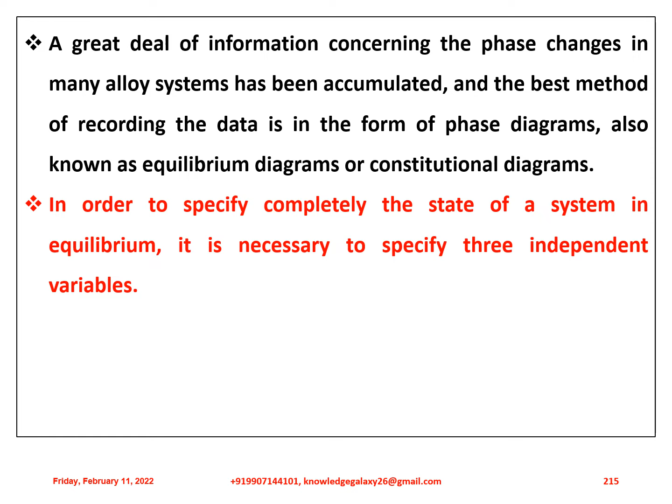In order to specify completely the state of a system in equilibrium, it is necessary to specify three independent variables. These variables, which are externally controllable, are temperature, pressure, and composition.

With pressure assumed to be constant at atmospheric value, the equilibrium diagram indicates the structural changes due to variation of temperature and composition. The diagram is essentially a graphical representation of an alloy system. Do remember this.

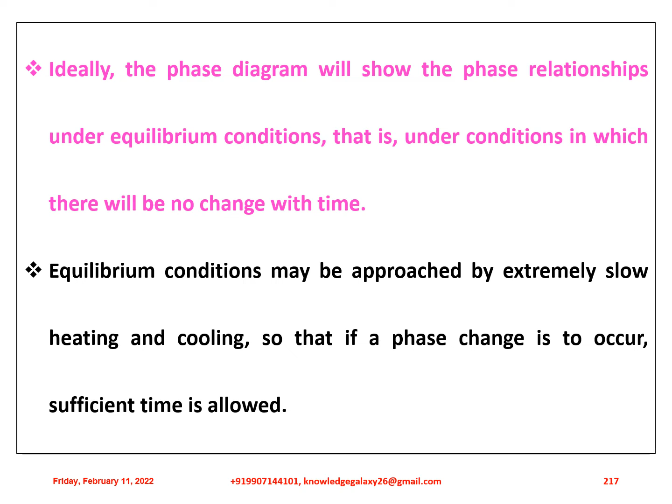Ideally, the phase diagram will show the phase relationships under equilibrium conditions, that is, conditions in which there will be no change with time. Equilibrium conditions may be approached by extremely slow heating and cooling, so that if a phase change is to occur, sufficient time is allowed.

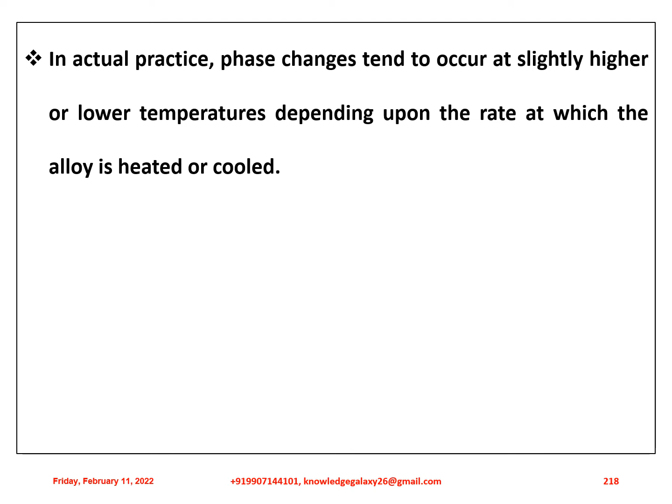In actual practice, phase changes tend to occur at slightly higher or lower temperatures depending upon the rate at which the alloy is heated or cooled. Rapid variation in temperature, which may prevent phase changes that would normally occur under equilibrium conditions, will distort and sometimes limit the application of these diagrams.

So let us have the introduction of the phase diagrams. Phase diagrams are an important tool in the armory of a materials scientist. In the simplest sense, a phase diagram demarcates regions of existence of various phases. So you can also correlate phase diagrams to a map, as maps guide us to our desired location, and so the phase diagrams also guide us to the knowledge of the various alloy systems.

Phase diagrams are also referred to as equilibrium diagrams or constitutional diagrams. The usage requires special attention, though the term used is equilibrium. In practical terms, the equilibrium is not global equilibrium but microstructural level equilibrium. So don't get confused with this, and clearly understand what is said for phase diagrams or equilibrium diagrams.

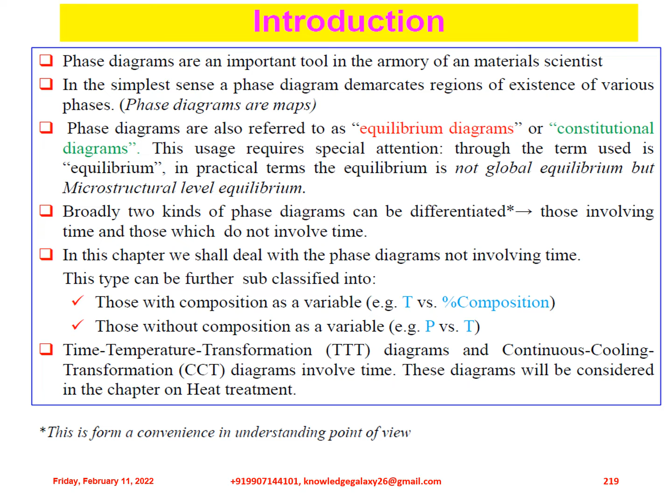Broadly, two kinds of phase diagrams can be differentiated, for convenience of understanding: those involving time and those which do not involve time. Presently we will be dealing with phase diagrams not involving time, and this type can be further subclassified into those with composition as a variable, example temperature versus percentage composition, and those without composition as a variable, example pressure versus temperature. Time temperature transformation (TTT) diagrams and continuous cooling transformation (CCT) diagrams involve time. These diagrams will be considered in a separate presentation.

So let us now discuss some definitions which are very useful and always used in phase diagrams. First, to start with, components of a system: independent chemical species which comprise the system. These are called components of the system. They could be elements, ions, or compounds.

Some examples: a gold-copper system, where the components are gold and copper, which are elements. Second, an ice-water system, where the component is H2O, a compound. Next, an example is an Al2O3 and Cr2O3 system, where the components are Al2O3 and Cr2O3.

Next term is phase. A phase is a physically homogeneous and distinct portion of a material system, example gas, crystal, amorphous, etc. Let us consider each one in detail.

Gases: the gaseous state is always a single phase, even if it is mixed at the atomic or molecular level. Second, liquids: a liquid solution is a single phase, that is, NaCl in water, and liquid mixtures consist of two or more phases, example oil in water, where there is no mixing at the atomic level.

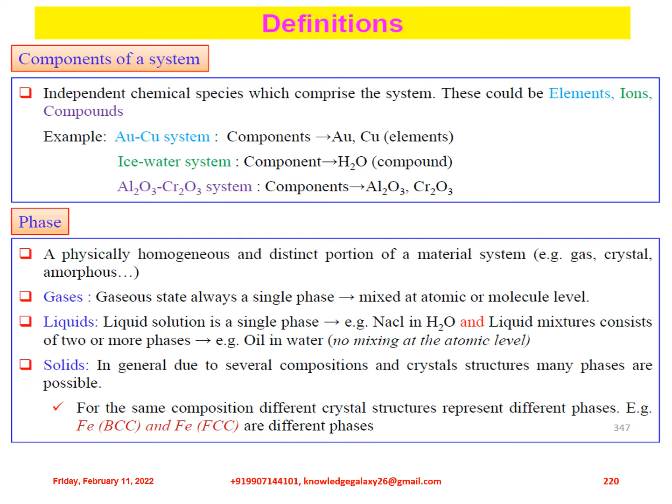Third, solids: in general, due to several compositions and crystal structures, many phases are possible. So for the same composition, different crystal structures represent different phases. Example: iron BCC and iron FCC are different phases.

Let us continue with some more definitions. What kinds of phases exist? My dear friends, there are practically six types of phases that exist. Let us discuss them. First, based on state: gas, liquid and solid.

Second, based on atomic order: amorphous, quasi-crystalline and crystalline. Third, based on band structure: insulating, semiconducting, semi-metallic and metallic. Next, based on property: paraelectric, ferromagnetic and superconducting. Next, based on stability: stable, metastable and unstable. Also, sometimes based on size or geometry of an entity: nanocrystalline, mesoporous and layered.

So now let us discuss phase transformation. What is called a phase transformation? Phase transformation is the change of one phase into another. For example, when water turns to ice, and alpha iron (BCC) turns to gamma iron (FCC), they are called phase transformations.

Grain is another important point and aspect. The single crystalline part of a polycrystalline metal, separated from similar entities by a grain boundary, is known as a grain. I hope it is clear to all of you.

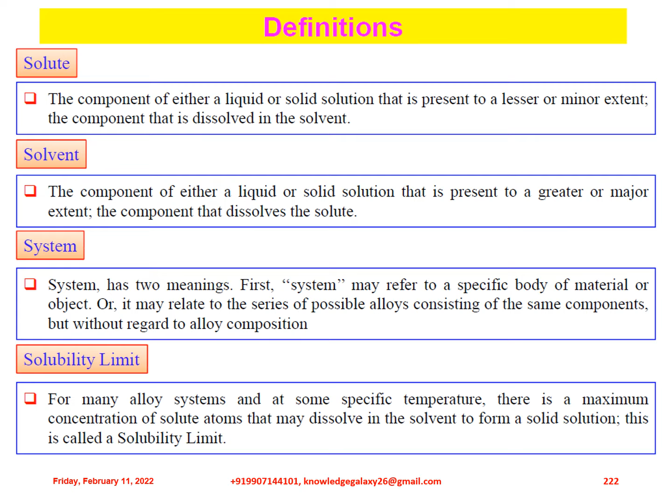Solubility limit. For many alloy systems, at some specific temperatures, there is a maximum concentration of solute atoms that may be dissolved in the solvent to form a solid solution. This is called a solubility limit.

Some more definitions to continue. Microstructure: phases plus defects plus residual stresses and their distribution. This is broadly the microstructure, consisting of structures requiring magnifications in the region of 100 to 1000 times, or the distribution of phases and defects in a material. It is commonly called microstructure.

Phase diagram: a map that gives the relationship between phases in equilibrium in a system as a function of temperature, pressure and composition. It is the map demarcating regions of stability of various phases, giving knowledge about the various phases and their stability and instability over different temperatures and concentration. Now let us discuss the variables or axes of phase diagrams.

The axes can be thermodynamic, that is temperature, pressure and volume, and next is kinetic or composition variables, C or percentage X. In a single component system, unary system, the usual variables are temperature and pressure. In phase diagrams used in materials science, the usual variables are temperature and percentage composition. In the study of phase transformation kinetics, TTT diagrams or CCT diagrams are also used, where the axes are temperature and time.

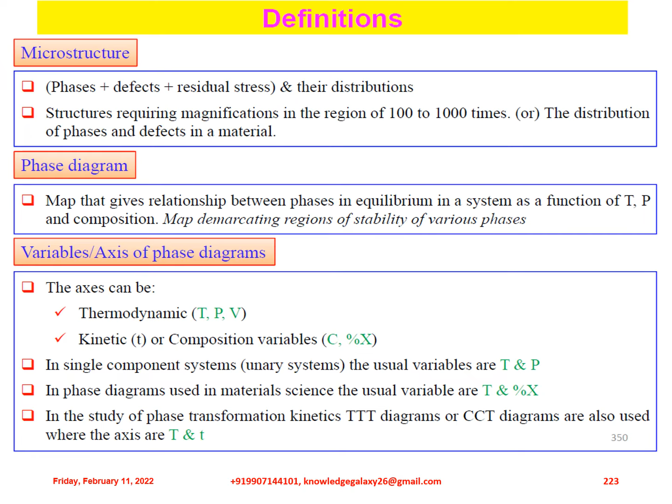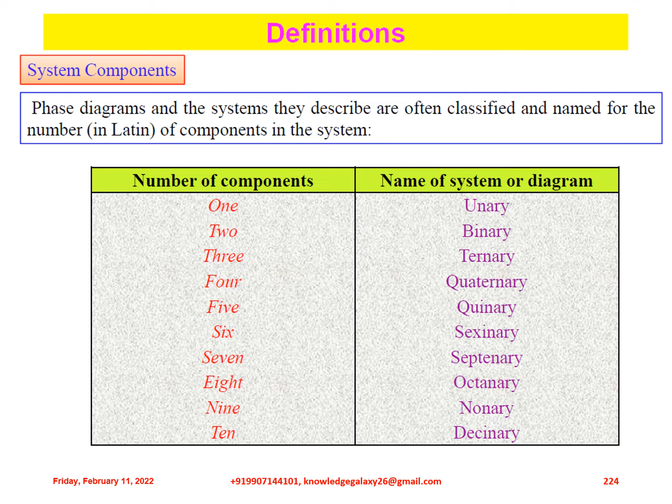Now let us consider unary phase diagrams in detail. Let us start with the simplest system possible, the unary system, wherein there is just one component. Though there are many possibilities even in unary phase diagrams in terms of the axes and phases, we shall only consider a temperature and pressure unary phase diagram.

The Gibbs phase rule here is F equals C minus P plus 2, where 2 is for temperature and pressure. I hope you remember the Gibbs phase rule, and if you have forgotten, you can refresh your knowledge by visiting my video on my channel regarding the Gibbs phase rule. So no composition variables are available here.

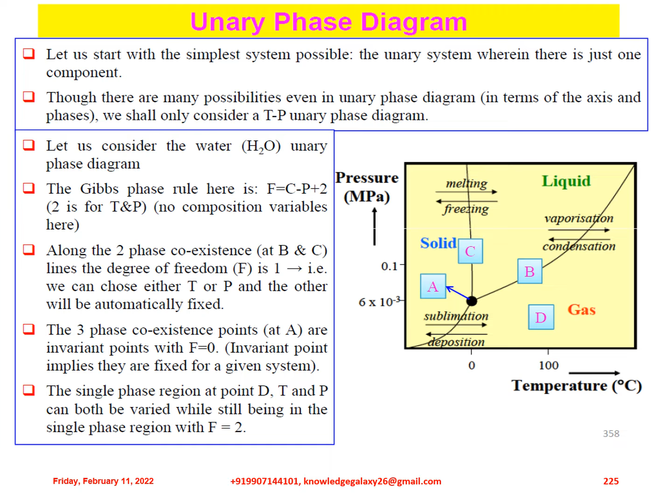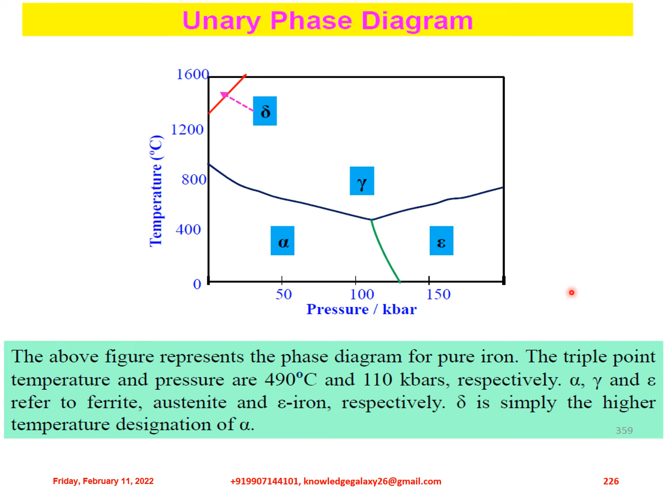Let us now consider binary phase diagrams. Binary implies that there are two components. Pressure changes often have little effect on the equilibrium of solid phases unless we apply huge pressures. Hence, binary phase diagrams are usually drawn at 1 atmospheric pressure.

The Gibbs phase rule is reduced to F equals C minus P plus 1, where 1 is for temperature only. Temperature and composition are the usual variables in materials phase diagrams. So the phase rule for condensed phases comes to F equals C minus P plus 1, with 1 for temperature, so don't get confused.

In the next page, we will consider the possible binary phase diagrams. These have been classified based on: first, complete solubility in both liquid and solid states; second, complete solubility in the liquid state but limited solubility in the solid state; and third, limited solubility in both liquid and solid states.

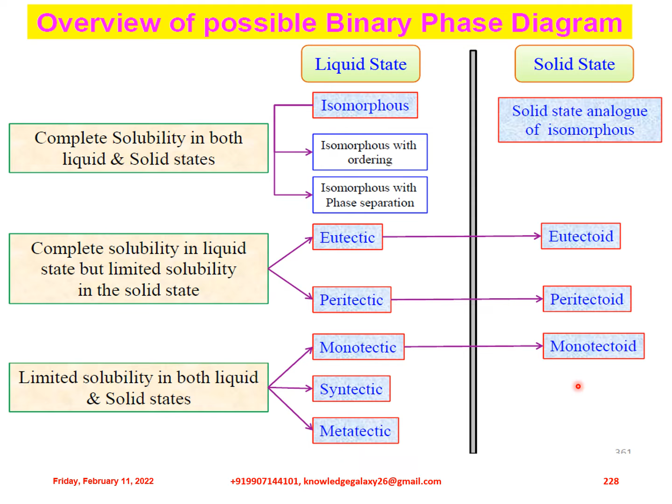Next comes limited solubility in both liquid and solid states. They have three types in the liquid state: monotectic, syntectic, and metatectic, and monotectoid in the solid state. I hope it is very much clear to you all.

Now let us consider the coordinates of phase diagrams. Phase diagrams are usually plotted with temperature in degrees centigrade, Celsius, or Fahrenheit as the ordinate, and the alloy composition in weight percentages as the abscissa.

The weight percentage of component A, WA, equals the weight of component A divided by the sum total of the weight of all components, into 100. Next, the atom or mole percentage of component A, XA, is given by the number of atoms or moles of component A divided by the sum total of number of atoms or moles of all components, into 100. I hope these calculations are very much clear to you all.

Atomic percentage of A equals X divided by (X plus Y into M by N), into 100. Atomic percentage of B equals (Y into M by N) divided by (X plus Y into M by N), into 100, where M is the atomic weight of metal A and N is the atomic weight of metal B. X is the weight percentage of metal A and Y is the weight percentage of metal B.

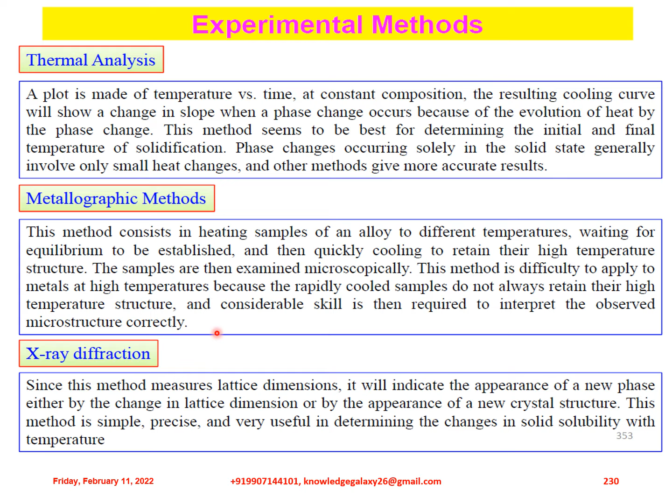Next method is X-ray diffraction. Since this method measures lattice dimensions, it will indicate the appearance of a new phase either by the change in lattice dimensions or by the appearance of a new crystal structure. This method is simple, precise, and very useful in determining the changes in solid solubility with temperature. I hope all these methods are very much clear to you all, and you should not have any doubt on them.

I hope we are doing so far so good. Now let us move on and study the classifications of equilibrium diagrams or phase diagrams, which may be classified as follows.

First, components completely soluble in the liquid state. Second, completely soluble in solid state, that is type 1. This is the subtype of 1.

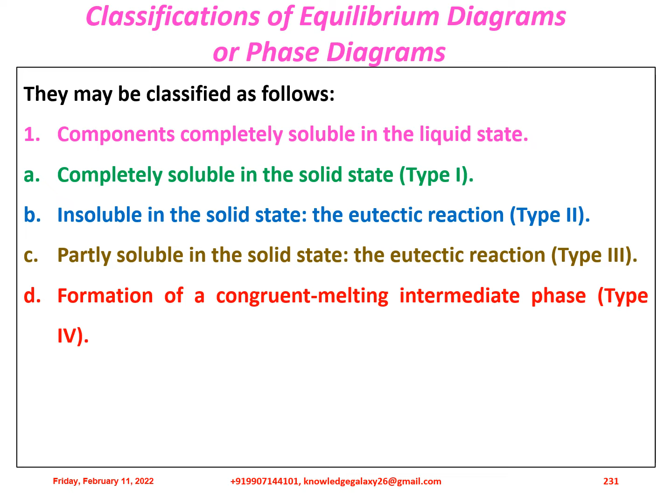Next is insoluble in the solid state, the eutectic reaction, that is type 2. Next is partly soluble in the solid state, that is the eutectic reaction, type 3. Fourth is formation of a congruent melting intermediate phase, that is type 4.

Fifth is the peritectic reaction, type 5. Second type of classification is components partly soluble in the liquid state, the monotectic reaction, that is type 6. Third type is components insoluble in the liquid state and insoluble in the solid state, they form type 7.

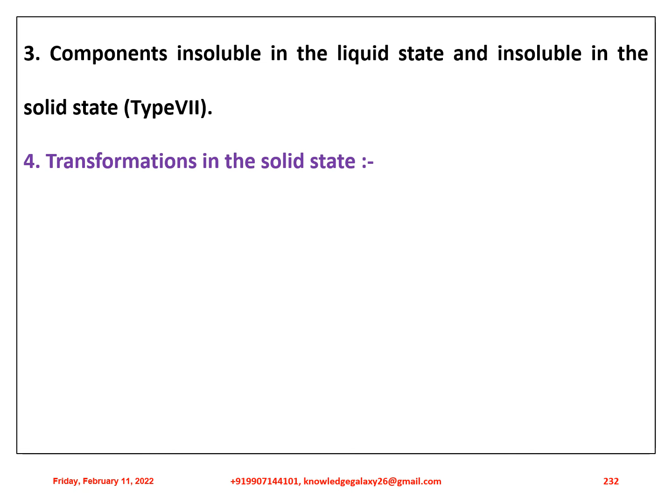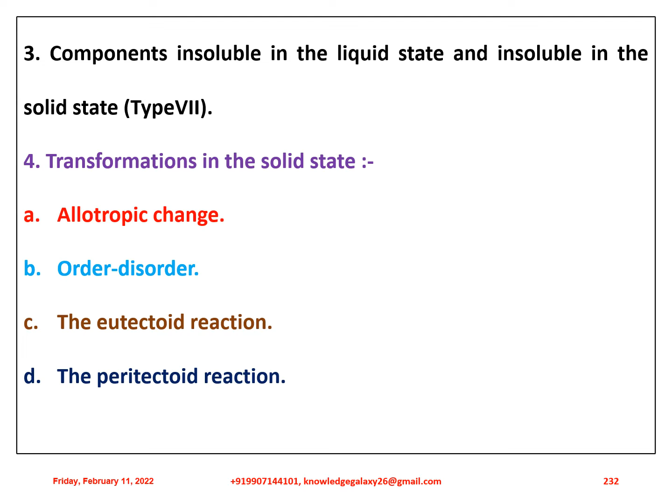Next is transformations in the solid state. There are many transformations which occur in the solid state. What are they? Let us discuss. First is allotropic change, next is order-disorder change, third is eutectoid reaction, and fourth is the peritectoid reaction. We will be discussing each of them in detail in the next detailed presentation.

Now we will be discussing in detail about the isomorphous phase diagram. Isomorphous phase diagrams form when there is complete solid and liquid solubility. Complete solid solubility implies that the crystal structure of the two components have to be the same and Hume-Rothery rules are to be followed. I hope you remember the Hume-Rothery rules, and if you have forgotten, you can watch my video on Hume-Rothery rules available on my channel.

Examples of systems forming isomorphous systems are copper-nickel, argentum-aurum, germanium-silicon, Al2O3 and Cr2O3 systems, etc. Both the liquid and solid contain the components A and B. In binary phase diagrams between two single phase regions, there will be a two phase region, that is, in the isomorphous diagram between the liquid and solid state, there is the liquid plus solid state. The liquid plus solid state is not a semi-solid state, that is, it is a solid of fixed composition and structure in equilibrium with a liquid of fixed composition and structure.

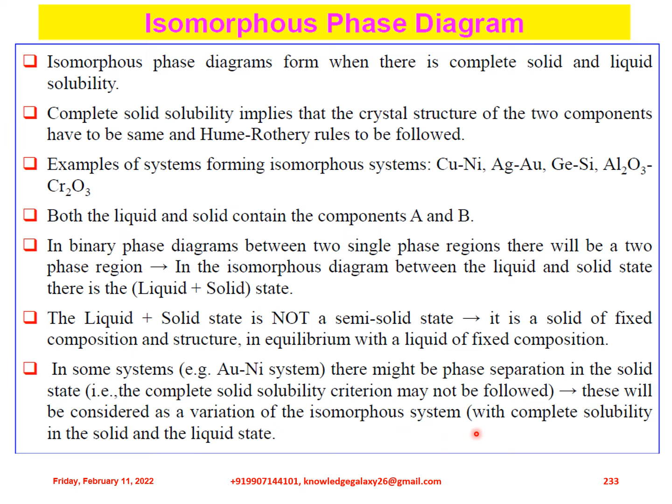In some systems, for example the aurum-nickel system, there might be phase separation in the solid state, that is, the complete solid solubility criterion may not be followed. These will be considered as a variation of the isomorphous system with complete solubility in the solid and liquid state.

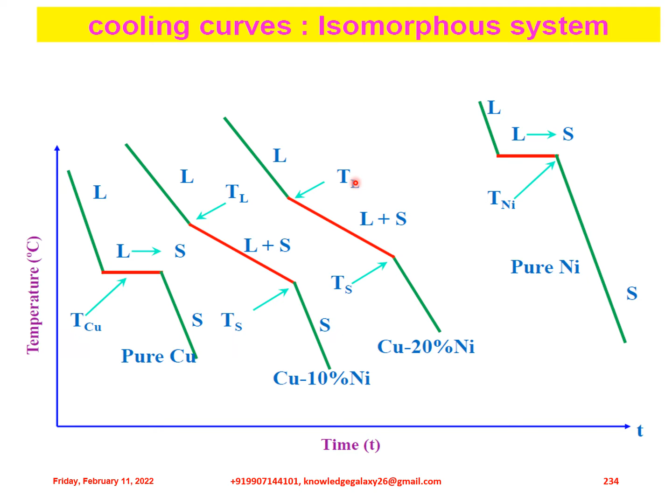These are the various cooling curves for isomorphous systems. We will be discussing each of them in detail.

So let us discuss solidification or cooling curves. This diagram is plotted against temperature and time. For this pure metal, as you can see, when solidification starts, the temperature falls, and the liquid starts to solidify at a given particular temperature, and it solidifies completely at a single temperature only, and then it solidifies further as a complete solid when the temperature is decreased further.

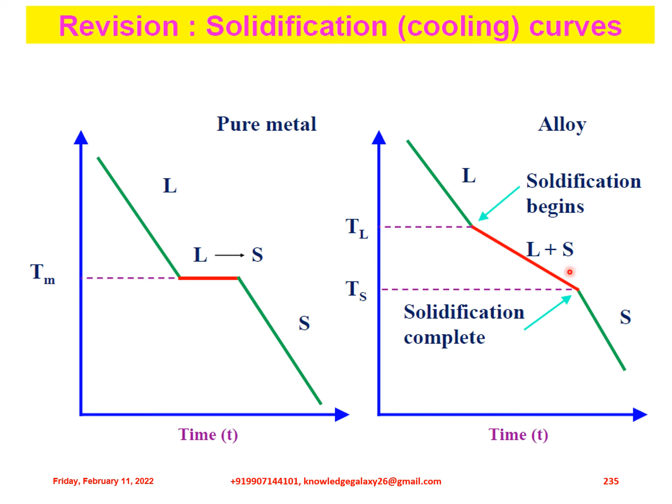In alloys, the solidification starts when the temperature is reduced. Solidification starts at a particular temperature and ends at some other temperature, so there is a range of temperature over which solidification completes. At one temperature, TL, solidification begins, and at the next temperature, TS, solidification completes. Below TS the alloy system is completely solid, and above TL the alloy system is completely liquid, and between TL and TS the alloy system has liquid plus solid both. I hope it is very much clear to you all.

Since the two metals are completely soluble in the solid state, the only type of solid phase formed will be a substitutional solid solution. The two metals will generally have the same type of crystal structure and differ in atomic radii by less than 8%.

The phase diagram consists of 2 points, 2 lines and 3 areas. I hope you still remember the structure of an element, structure of materials, which I have made a video separately on, available in my channel. You can watch that.

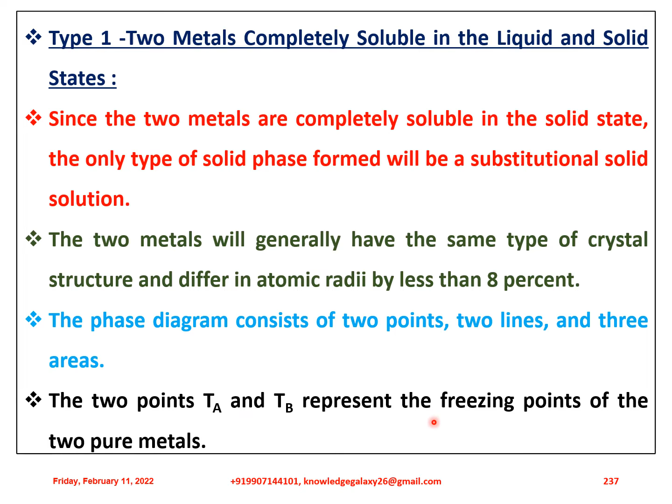The 2 points TA and TB represent the freezing points of the two pure metals.

The upper line obtained by connecting the points showing the beginning of solidification is called the liquidus line, and the lower line determined by connecting the points showing the completion of solidification is called the solidus line. This is the definition of the two lines which I have just explained.

The area above the liquidus line is a single phase region, and an alloy in that region will consist of a homogeneous liquid solution.

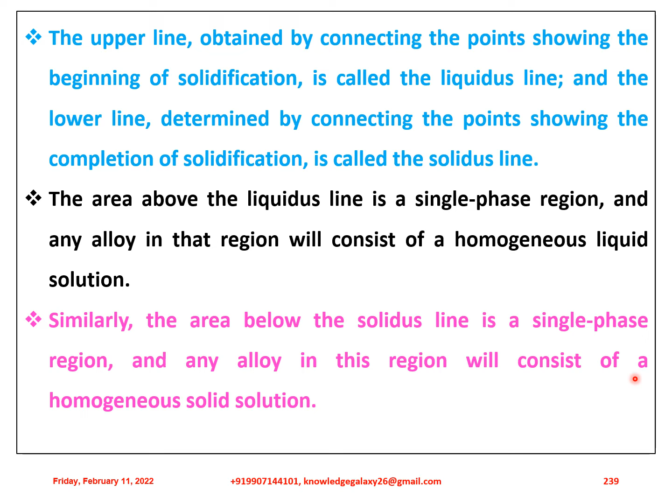Similarly, the area below the solidus line is a single phase region, and any alloy in this region will consist of a homogeneous solid solution. I have explained all these things.

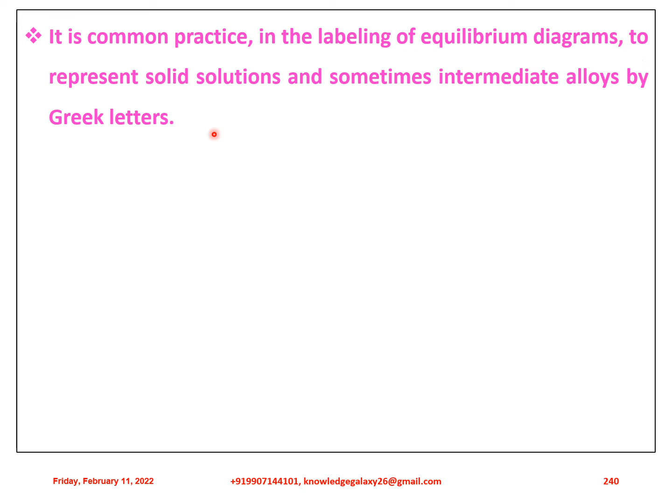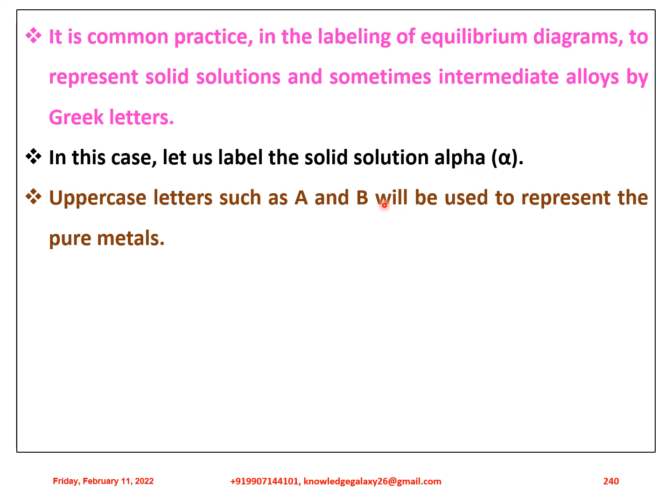It is common practice in the labeling of equilibrium diagrams to represent solid solutions and sometimes intermediate alloys by Greek letters. In this case, let us label the solid solution alpha. Uppercase letters such as A and B will be used to represent the pure metals.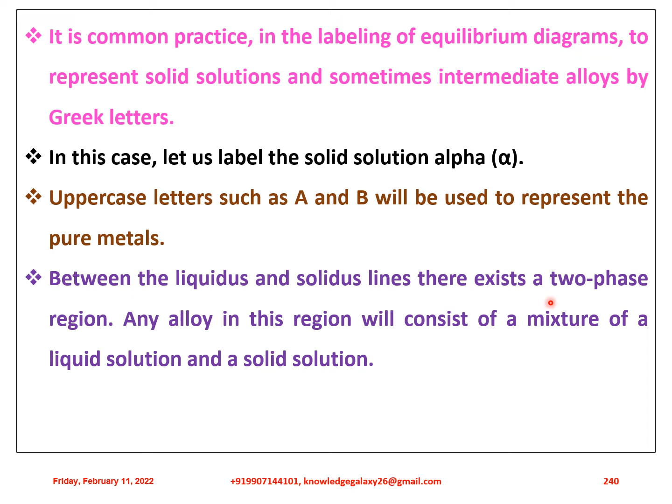Between the liquidus and solidus line, there exists a two-phase region. Any alloy in this region will consist of a mixture of a liquid solution and a solid solution.

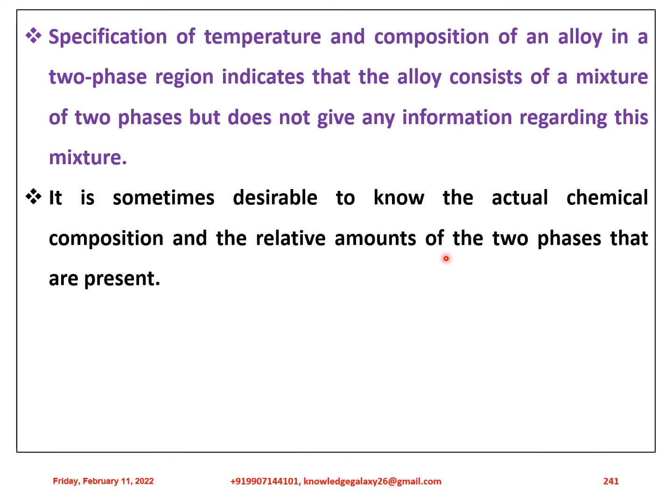Specification of temperature and composition of an alloy in a two-phase region indicates that the alloy consists of a mixture of two phases but does not give any information regarding this mixture. It is sometimes desirable to know the actual chemical composition and the relative amounts of the two phases that are present.

In order to determine this information, it is necessary to apply two rules. Let us now discuss about these two rules in detail, each one by one.

The first one is rule 1, chemical composition of phases. To determine the actual chemical composition of the phases of an alloy in equilibrium at any specified temperature in a two-phase region, draw a horizontal temperature line called a tie line to the boundaries of the field. These points of intersection are dropped to the baseline and the composition is read directly. This is known as the tie line rule.

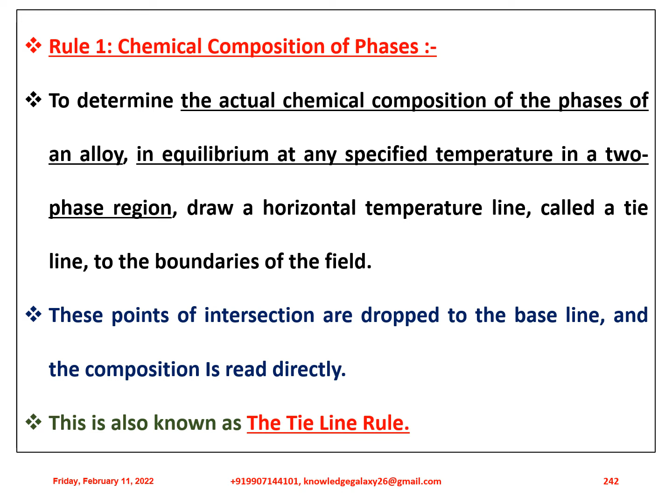My dear friends, this is very much important, the tie line rule.

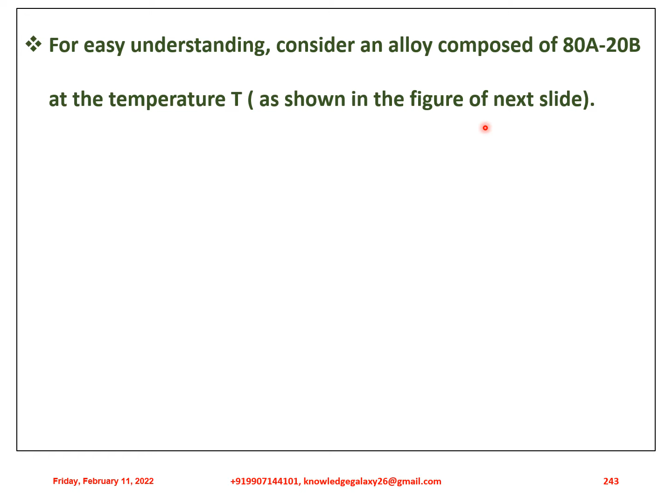For easy understanding, let us consider an alloy composed of 80A and 20B at the temperature T as shown in the figure in the next slide. The alloy is in a two-phase region. Applying rule 1, draw the tie line to the boundaries of the field.

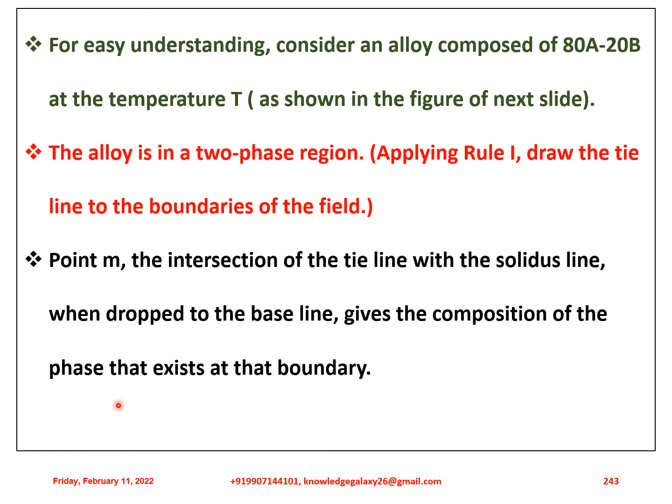Point M, the intersection of the tie line with the solidus line when dropped to the baseline, gives the composition of the phase that exists at that boundary.

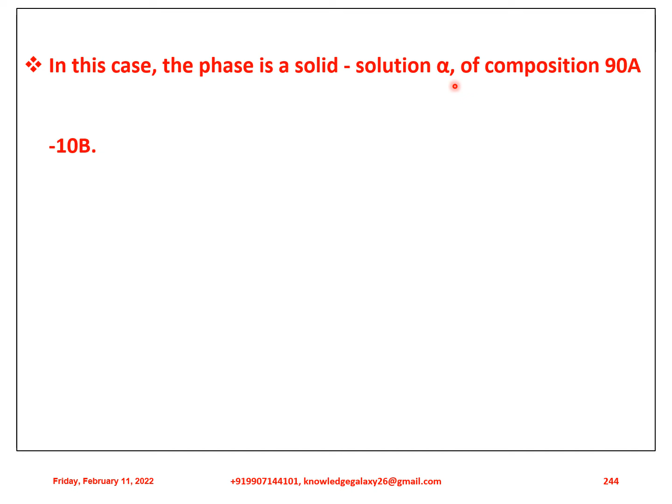In this case, the phase is a solid solution alpha of composition 90A and 10B. Similarly, point O when dropped to the baseline will give the composition of the other phase constituting the mixture, in this case the liquid solution of composition 74A and 26B.

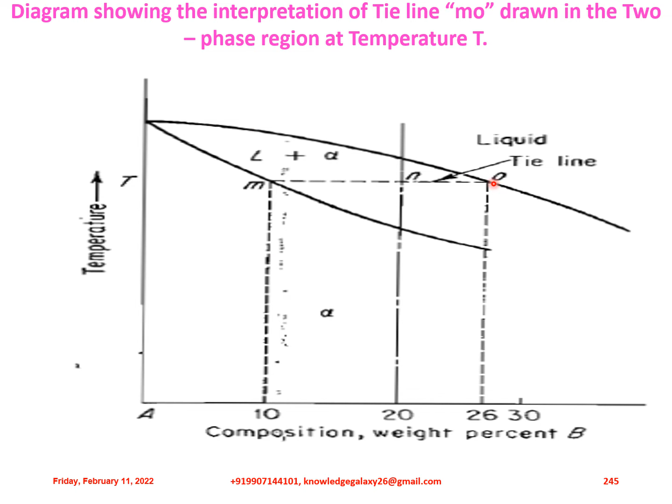This is the diagram which I have just explained, showing the interpretation of the tie line MO drawn in the two-phase region at temperature T. This is the M and this is point O, and this all I have just explained in the previous slides.

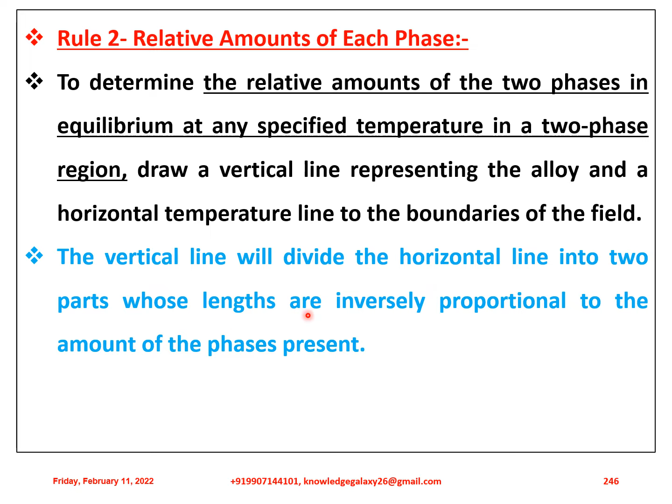So the next rule is relative amounts of each phase. To determine the relative amounts of the two phases in equilibrium at any specified temperature in a two-phase region, draw a vertical line representing the alloy and a horizontal temperature line to the boundaries of the field. The vertical line will divide the horizontal line into two parts whose lengths are inversely proportional to the amount of the phases present.

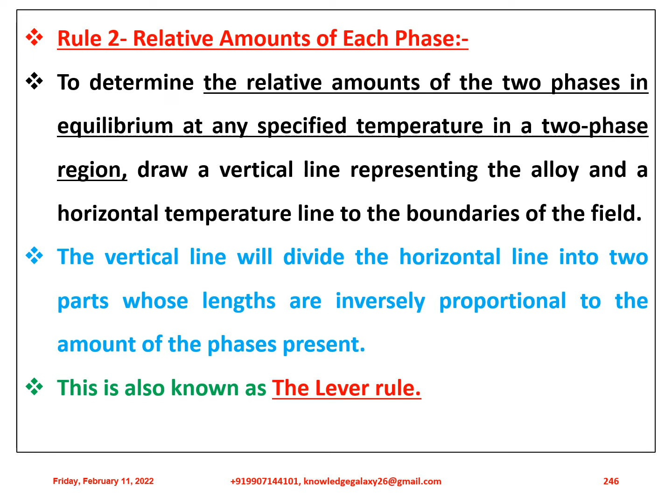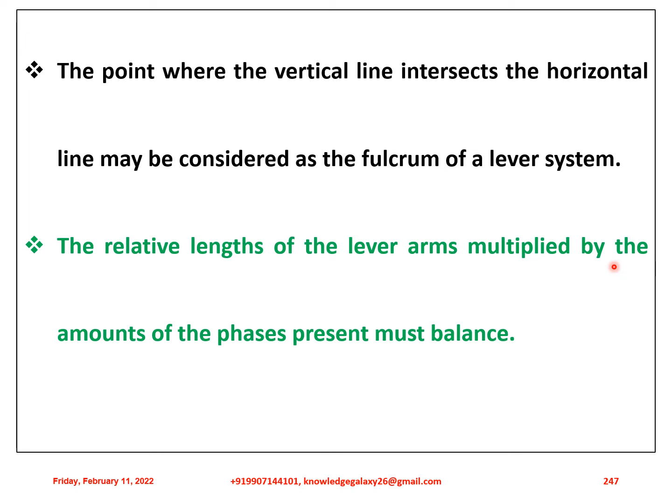The point where the vertical line intersects the horizontal line may be considered as the fulcrum of a lever system. The relative lengths of the lever arms multiplied by the amounts of the phases present must balance.

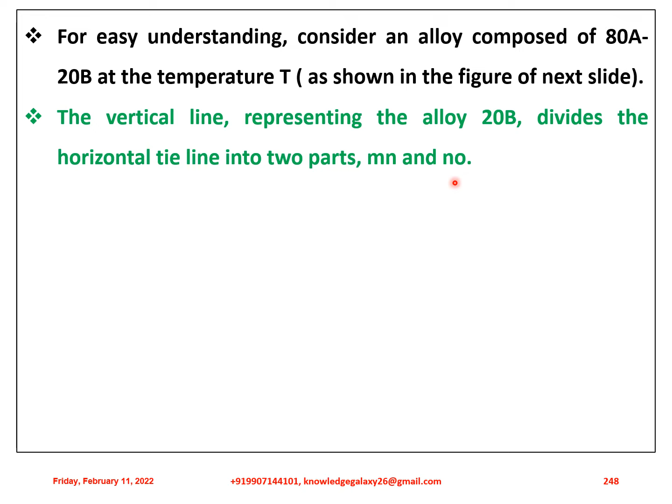For easy understanding, consider an alloy composed of 80A and 20B at the temperature T. The figure is shown in the next slide. The vertical line representing the alloy 20B divides the horizontal tie line into two parts, Mn and NO. You will be seeing the picture in the next slide. Here are some details of that picture.

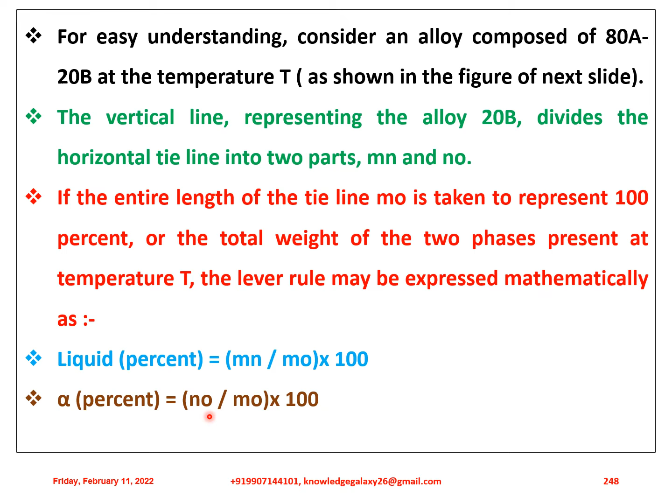If the entire length of the tie line MO is taken to represent 100%, or the total weight of the two phases present at temperature T, the lever rule may be expressed mathematically as: first, liquid percent is equal to Mn divided by MO into 100, and second, alpha, that is solid percentage, is equal to NO divided by MO into 100.

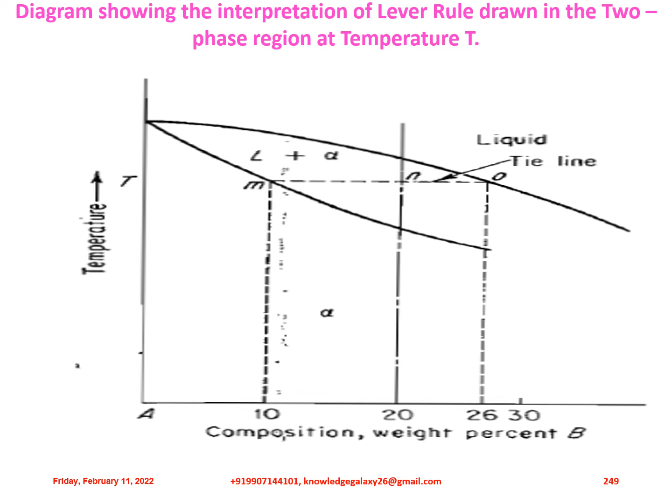So this is the diagram which shows the interpretation of lever rule drawn in the two-phase regions at temperature T. You can very much see and observe this picture which I have just explained the details of, and further more details are being explained in the coming slides.

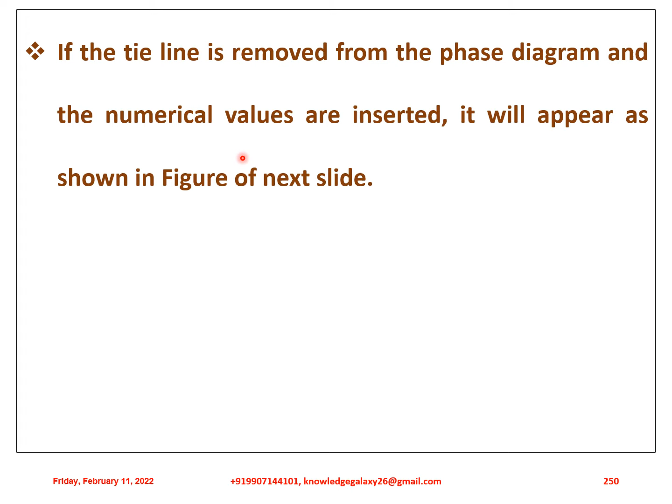If the tie line is removed from the phase diagram and the numerical values are inserted, it will appear as shown in the figure of the next slide.

Applying the above equations: first, liquid percent comes to 10 divided by 16 into 100, which is equal to 62.5%, and solid alpha percent is equal to 6 divided by 16 into 100, which is equal to 37.5%.

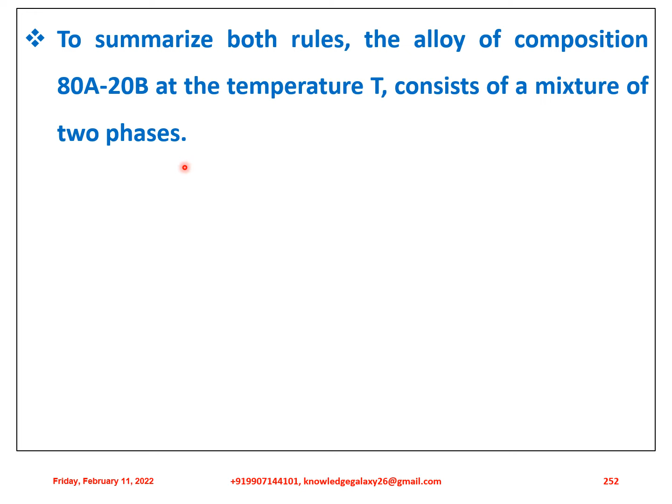To summarize both rules, the alloy of composition 80A and 20B at temperature T consists of a mixture of two phases. One is the liquid solution of composition 74A and 26B, constituting 62.5% of all the material present, and the other is a solid solution of composition 90A and 10B, making up 37.5% of all the material present. I hope it is very much clear to you all, the computation of the lever rule and the application of the tie rule.

So here are some more examples of the tie line and lever rule. You can pause the video and observe all the details of this slide and how to calculate the different amounts of different phases present by applying the tie line and lever rule. It is very much important because in many exams it is always asked how to determine the different quantities of phases present in the phase diagram.

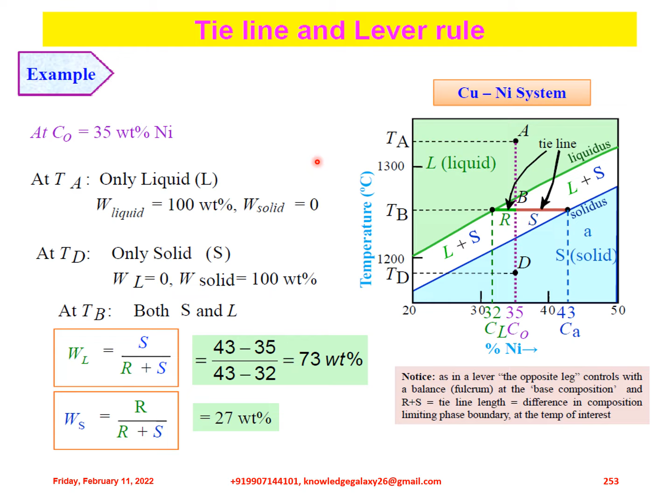Let's move on to variations in isomorphous systems. An alloy typically melts over a range of temperatures. However, there are special compositions which can melt at a single temperature, like a pure metal.

There is no difference in the liquid and solid compositions. It begins and ends solidification at a constant temperature with no change in composition, and its cooling curve will show a horizontal line. Such alloys are known as congruent melting alloys, sometimes called pseudo-eutectic alloys. Examples are CuAu and nickel-Pd. This is case A and case B.

The variables are temperature, CLB, and CSB, which is equal to 3, and these are the various depictions of the phase diagram. You can pause the video and observe it very carefully.

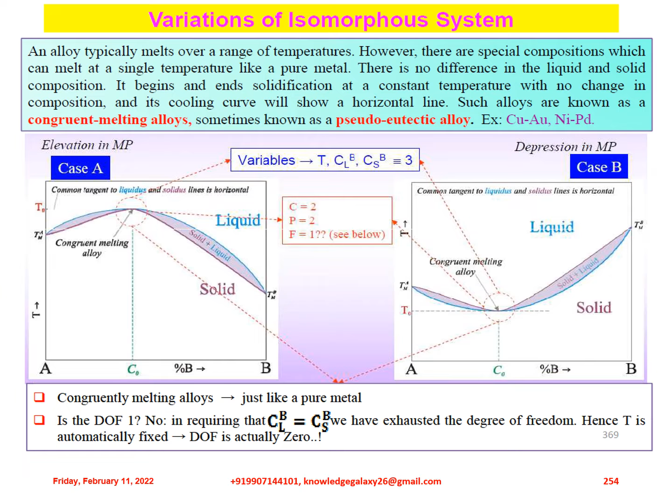Congruent melting alloys are just like a pure metal. Do remember this. Is the degree of freedom 1 here? No. In requiring that CLB is equal to CSB, we have exhausted the degree of freedom. Hence, T is automatically fixed, so the degree of freedom is actually 0. You can observe all these details of this diagram and clarify your doubt.

Another variation of the isomorphous system: elevation in the melting point means that the solid state is more stable, that is, crudely speaking, the ordered state is more stable. An ordering reaction is seen at low temperatures.

Depression in melting point means the liquid state, that is the disordered state, is more stable. Phase separation is seen at low temperatures. So phase separation can be thought of as the opposite of ordering. In ordering, compound formation occurs for negative values of delta H mix.

These are the descriptions of these two diagrams, representing case 1 and case 2. The congruent melting alloy melts at a particular temperature - above this is liquid, below this is solid, and the same applies here. You can observe the elevation of melting point here and depression of melting point here, which I have just explained.

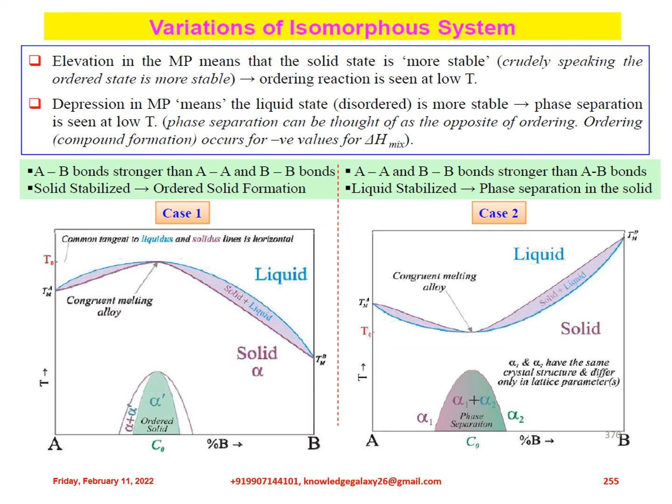Some more examples of isomorphous systems with phase separation. You can pause the video and observe it very carefully.

Now this diagram shows equilibrium cooling. The above figure represents the very slow cooling under equilibrium conditions of a particular alloy, 70A and 30B, which will now be studied to observe the phase changes that occur.

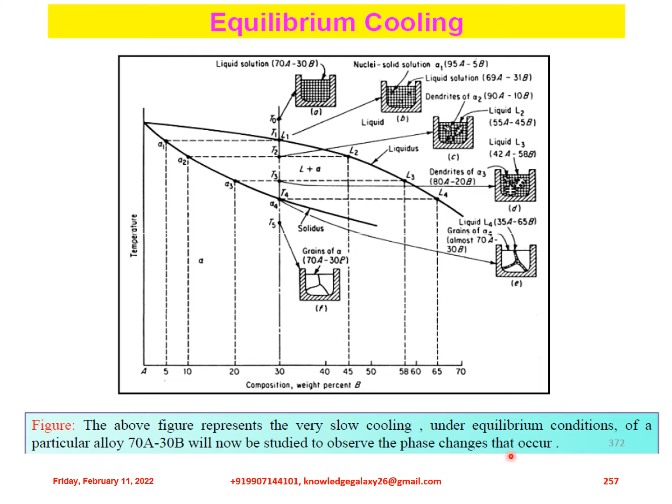Now let us discuss equilibrium cooling. This alloy at temperature T0 is a homogeneous single phase liquid solution A and remains so until temperature T1 is reached. Since T1 is on the liquidus line, freezing or solidification now begins. The first nuclei of solid solution to form, alpha 1, will be very rich in the higher melting point metal A and will be composed of 95A and 5B.

This is given by the tie line rule. Since the solid solution forming takes material very rich in A from the liquid, the liquid must get richer in B. Just after the start of solidification, the composition of the liquid is approximated as 69A and 31B.

When the lower temperature T2 is reached, the liquid composition is at L2, the only solid solution in equilibrium with L2, and therefore the only solid solution forming at T2 is alpha 2. Applying the tie line rule, alpha 2 is composed of 10B. Hence, as the temperature is decreased, not only does the liquid composition become richer in B, but also the solid solution. At T2, crystals of alpha 2 are formed surrounding the alpha 1 composition cores, and also separate dendrites of alpha 2. See the figure below; you can observe these details.

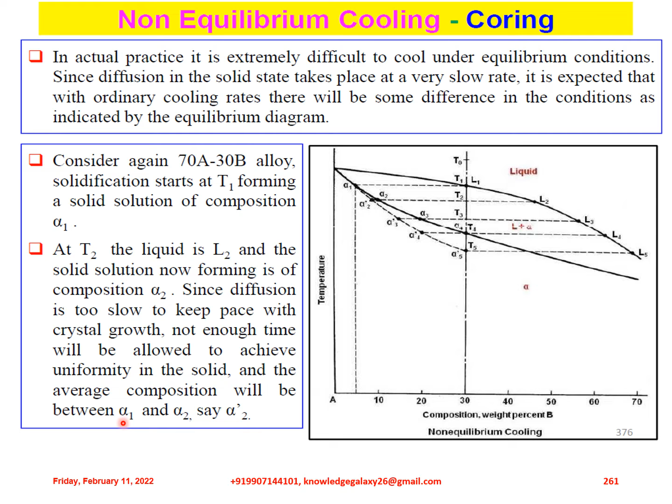Consider again a 70A and 30B alloy. Solidification starts at T1, forming a solid solution of composition alpha-1. At T2, the liquid is L2 and the solid solution now forming is of composition alpha-2. Since diffusion is too slow to keep pace with crystal growth, not enough time will be allowed to achieve uniformity in the solid, and the average composition will be between alpha-1 and alpha-2, say alpha-2 prime.

In non-equilibrium cooling, that is coring, as the temperature drops, the average composition of the solid solution will depart still further from equilibrium conditions. It seems that the composition of the solid solution follows a non-equilibrium solidus line, alpha-1 to alpha-5 prime, shown dotted in the figure. The liquid, on the other hand, has essentially the composition given by the liquidus line.

Since diffusion is relatively rapid in the liquid, at T3 the average solid solution will be of composition alpha-3 prime instead of alpha-3.

Under equilibrium cooling, solidification should be complete at T4. However, since the average composition of the solid solution alpha-4 prime has not reached the composition of the alloy, some liquid must still remain. Applying the lever rule at T4 gives alpha-4 prime equal to 75% and L4 equal to 25%. Therefore, solidification will continue until T5 is reached.

At this temperature, the composition of the solid solution alpha-5 prime coincides with the alloy composition and solidification is complete. The last liquid to solidify, L5, is richer in B than the last liquid to solidify under equilibrium conditions.

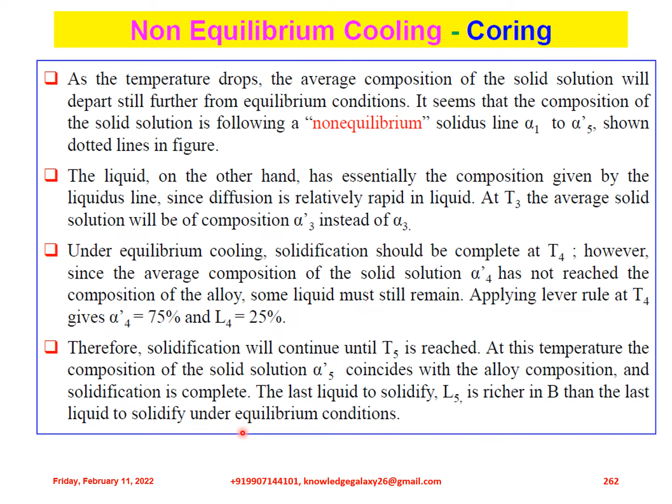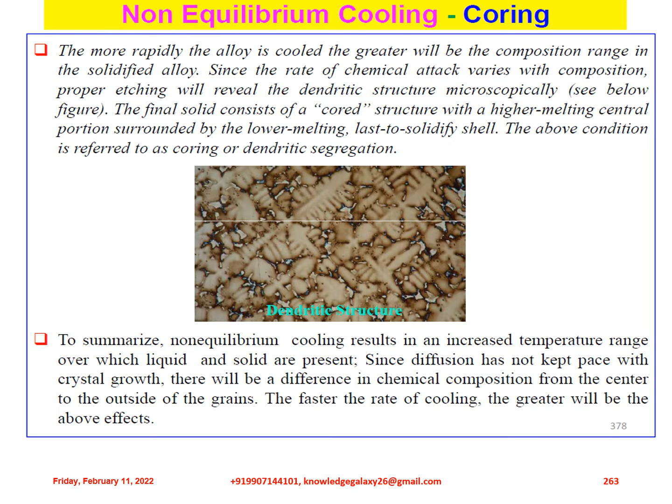To summarize, non-equilibrium cooling results in an increased temperature range over which liquid and solid are present. Since diffusion has not kept pace with crystal growth, there will be a difference in chemical composition from the center to the outside of the grains. The faster the rate of cooling, the greater these effects will be. I hope it is very much clear to you all. The dendritic or coring structure is asked about in many questions, in almost every exam, so be clear about that.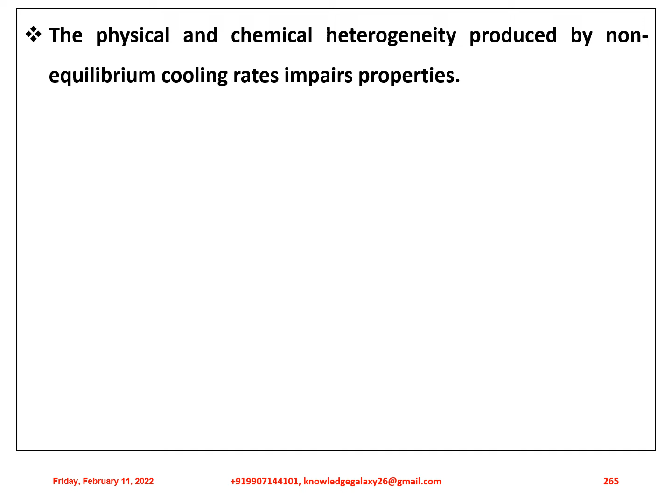The physical and chemical heterogeneity produced by non-equilibrium cooling rates impairs properties. Cored structures can be homogenized by annealing.

For instance, an ingot may be heated to a temperature just below the solidus temperature, where diffusion is rapid. The temperature must be selected with care because some regions might be rich enough in low melting point metal to cause localized fusion.

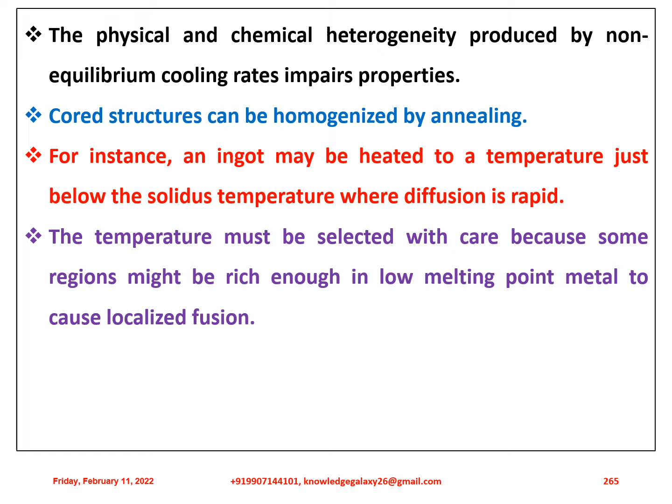However, when practicable, it is more effective to cold work a cored structure before annealing.

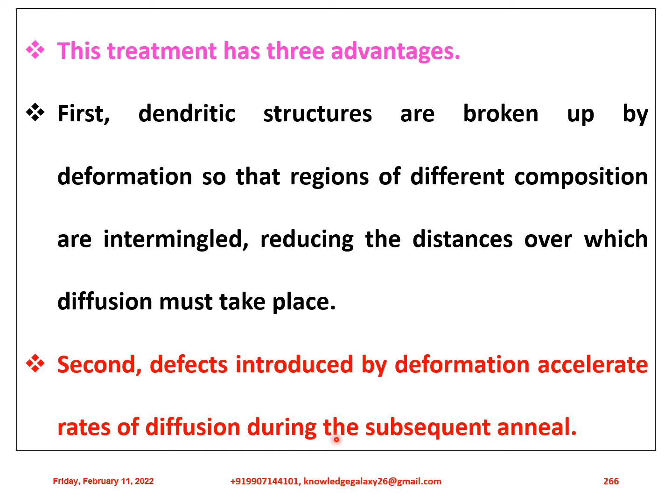This treatment has three advantages. First, dendritic structures are broken up by deformation so that regions of different composition are intermingled, reducing the distances over which diffusion must take place. Second, defects introduced by deformation accelerate rates of diffusion during the subsequent anneal. Third, deformation promotes recrystallization during subsequent annealing, making it more likely that the cast structure will be completely replaced by a generation of new equiaxed grains.

Hot working is also capable of eliminating the coring.

Now let us discuss homogenization. Cored structures are most common in as-cast metals. From the earlier discussion of the origin of a cored structure, it is apparent that the last solid formed along the grain boundaries and in the interdendritic spaces is very rich in the lower melting point metal. Depending upon the properties of the lower melting point metal, the grain boundaries may act as a plane of weakness. It will also result in a serious lack of uniformity in mechanical and physical properties and, in some cases, increased susceptibility to intergranular corrosion because of preferential attack by corrosive medium.

Therefore, for some applications, a cored structure is objectionable. There are two methods for solving the problem of coring. One is to prevent its formation by slow freezing from the liquid, but this results in large grain size and requires a very long time. The preferred method industrially is to achieve equalization of composition, or homogenization of the cored structure, by diffusion in the solid state.

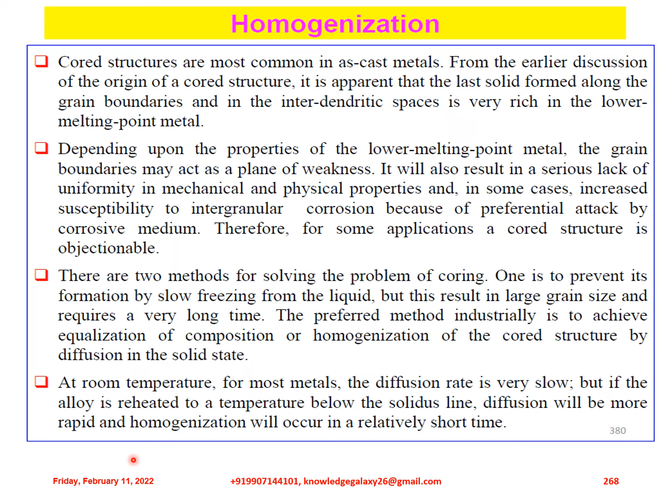At room temperature, for most metals, the diffusion rate is very slow, but if the alloy is reheated to a temperature below the solidus line, diffusion will be more rapid and homogenization will occur in a relatively short time.

Now let us discuss zone refining. Extreme purification of a metal can radically improve properties such as ductility, strength and corrosion resistance. Zone refining was devised by W. G. Pfann, its development being driven by the demands of the newly invented transistor for homogeneous and ultra-pure metals, for example silicon and germanium.

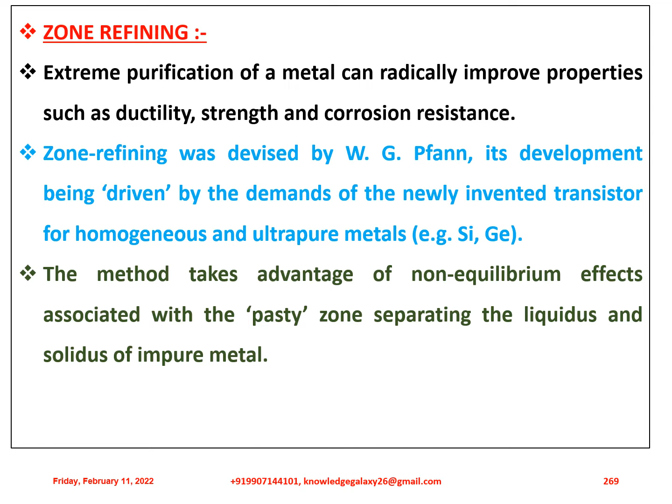The method takes advantage of non-equilibrium effects associated with the pasty zone separating the liquidus and solidus of an impure metal. Considering the portion of the figure, where addition of solute lowers the liquidus temperature, the concentration of solute in the liquid Cl will always be greater than its concentration Cs in the solid phase. That is, the distribution coefficient K, equal to Cs divided by Cl, is less than unity.

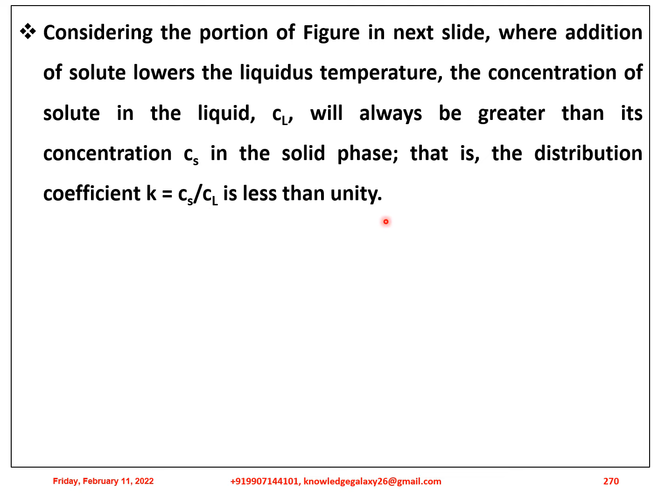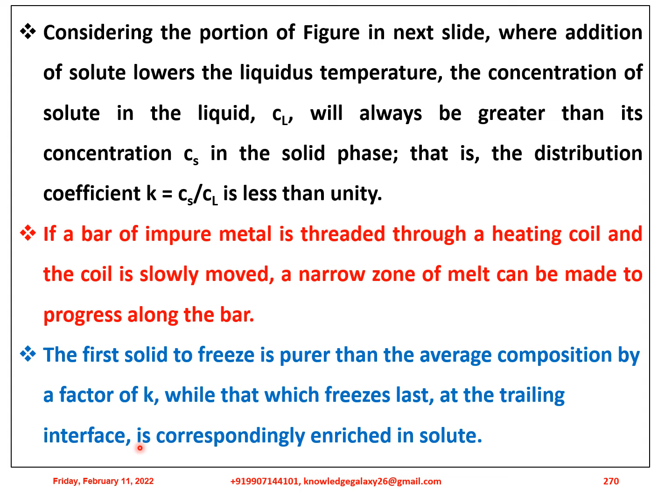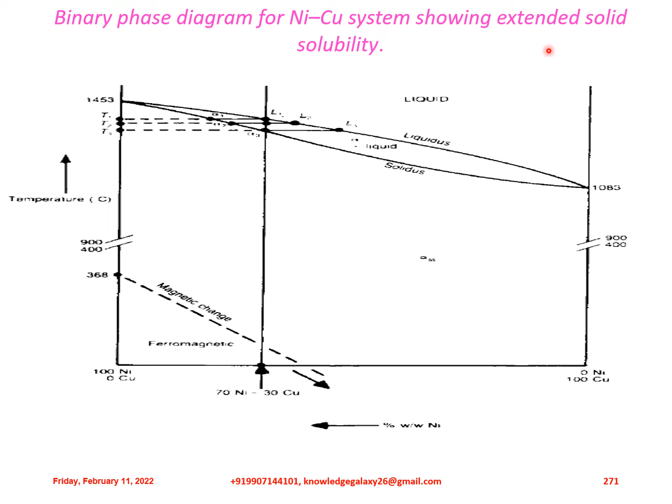If a bar of impure metal is threaded through a heating coil and the coil is slowly moved, a narrow zone of melt can be made to progress along the bar. The first solid to freeze is purer than the average composition by a factor of K, while that which freezes last at the trailing interface is correspondingly enriched in solute. This is the binary phase diagram for the nickel-copper system showing the extended solid solubility which I have just explained.

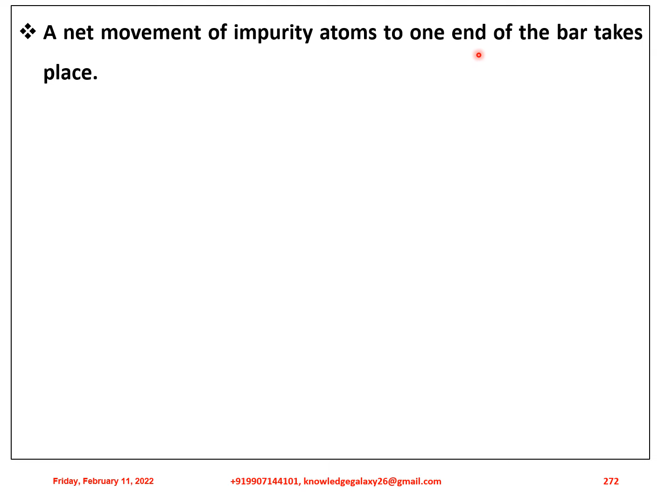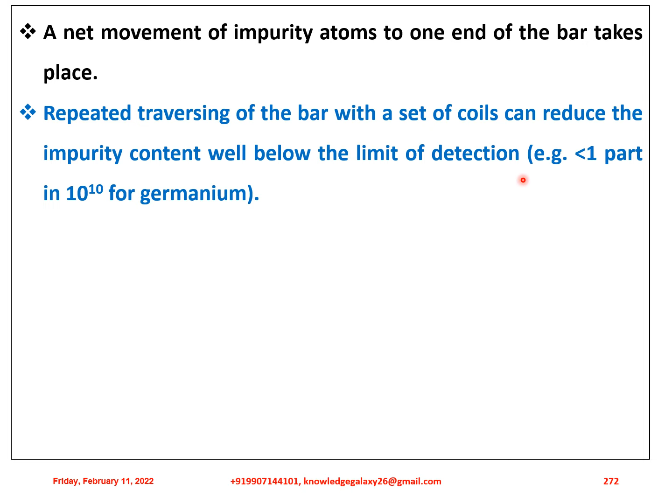A net movement of impurity atoms to one end of the bar takes place. Repeated traversing of the bar with a set of coils can reduce the impurity content well below the limit of detection, that is, less than 1 part in 10 to the power 10 for germanium.

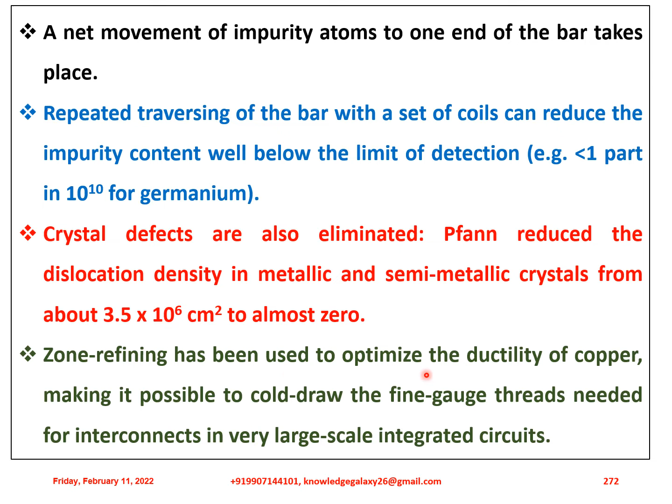Crystal defects are also eliminated; that is, Pfann reduced the dislocation density in metallic and semi-metallic crystals from about 3.5 times 10 to the power 6 per square centimeter to almost zero. Zone refining has been used to optimize the ductility of copper, making it possible to cold draw the fine gauge threads needed for interconnects in very large scale integrated circuits.